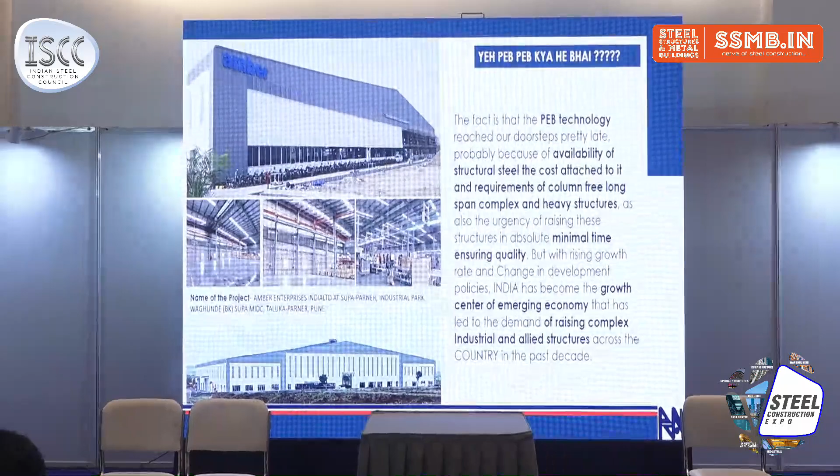Now, this is one project which we have done in Supa MIDC. It's 3.5 lakh square feet. As you can see, a long span structure. And we completed it in a short span of 6 months, including, as I always say, pencil to production. You pick up a pencil with an idea, develop the idea from concept to detailing, get into manufacture, get into erection, and complete the whole process. The RCC design is left up to plinth. I'll come to that procedure as well.

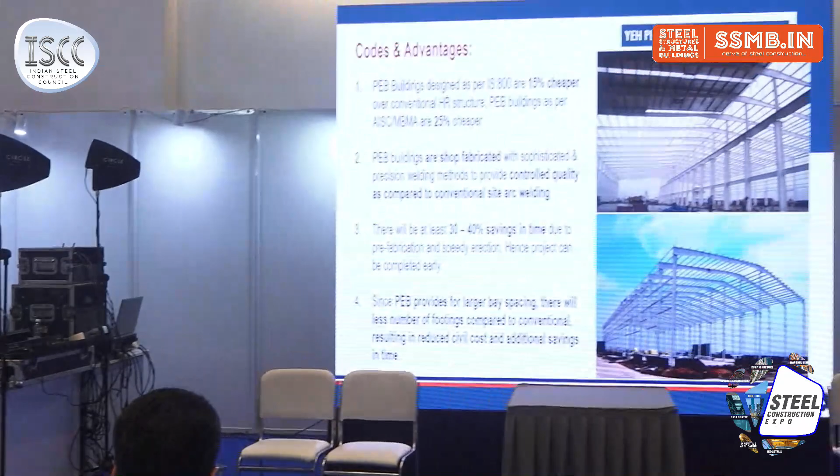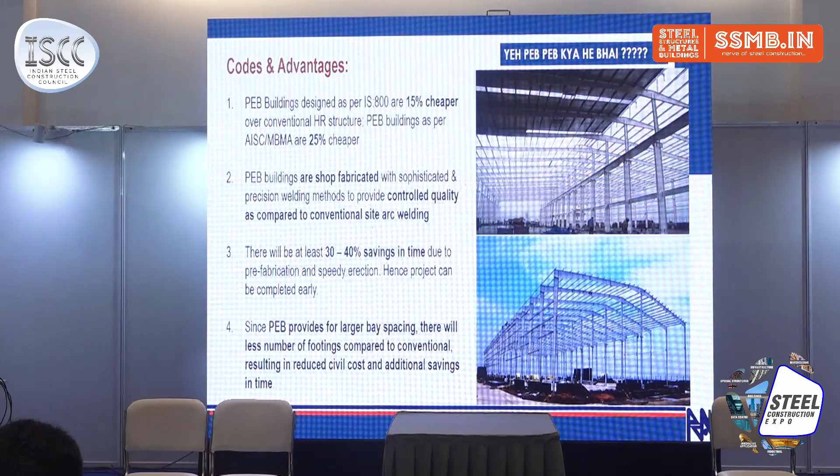Now the codes and advantages: 15% cheaper over conventional, that's what the code says. They are shop fabricated, with controlled quality as compared to conventional site arc welding. 30 to 40% savings in time, which I have been talking about. And it provides larger bay spacing, resulting in fewer footings compared to conventional.

Now, when we go to RCC buildings, those who are doing residential, I think there was a guy here with residential buildings, we are talking about 3 meter by 6 meter spanning. Here we are talking about 50 meters plus. So we have to avoid columns. And people say it's going to be heavier, zyada lagega steel, span badhega to zyada lagega. It's not like that. We reduce the number of columns.

It's like a concrete building, sorry, structural engineers, I have to salute them, 3 meters by 6 meters now moves to, let's say, 10 meters by 18 meters with post-tension slabs or flat slabs. But in that case, the comment is they are going to be expensive. And I show them an analysis: look how many columns we have saved, how much concrete, how many footings, how many plinth beams. If you calculate the overall picture, you will find that this technology is cheaper.

So technology always comes with a rider of cost saving. Either it is saving cost or it is saving time. Both are equally important because time again is cost. You save time, you can go into production earlier. If it is a shopping mall, they will start selling shirts and jackets much earlier and make money.

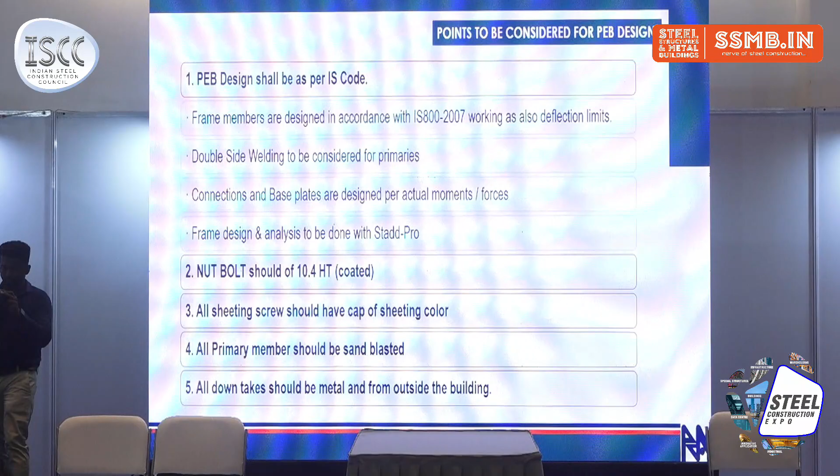Now there are a few tips which we wanted to give. Frame members are designed in accordance with whatever IS number. I think it is revised and updated now, but the basic was that. Double side welding to be considered for primaries. Connection and base plates are designed for actual moments and forces. Nut bolts should be coated. All sheeting screws should have a cap of the sheeting color.

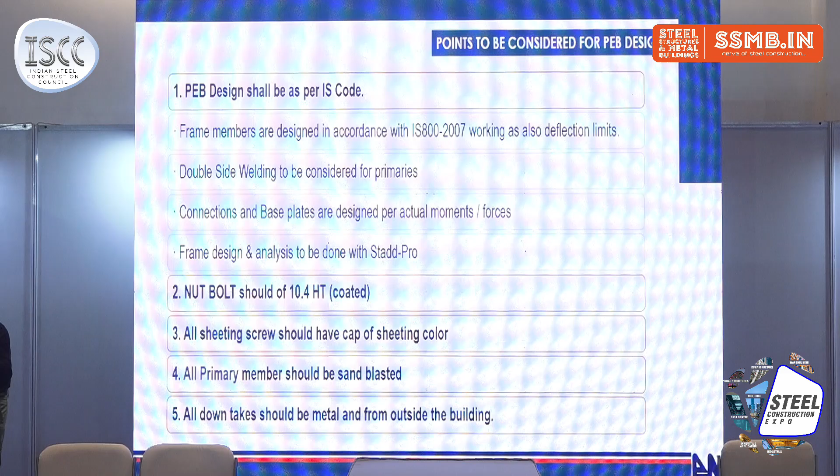Now many times I find that there is a difference between PEB agency A and PEB agency B. They try to have some shortcuts. So they will say, "ठीक है यार, nut को color क्यों लगाना है?" I mean that is not there. But there are some companies like Interarch, and I've seen many good companies who actually bring in the caps which match with the RAL color of the sheet, and then it makes it really beautiful.

Okay. Because we don't want to exhibit the nuts and the joints and the junctions of the steel. We want to hide them actually. So we do that. All sheeting screws should have the caps and all primary members should be sandblasted. Downtake should be metal and from outside of the building. No, I have a correction here.

The correction is, most of the time the PEB agencies, along whatever grid they have, they take a gutter there at the top and a downtake from the outside. Now this is actually killing our architecture. Because whatever the length is, it is divided by those pipes running down. And if it is an ordinary PEB agency, the pipe color will not match with the sheeting color. That means it is spoiling the building. And we have come out with this technology basically to make beautiful buildings.

Earlier we were calling them shed. I hate that word called SHED. Why shed? I mean, it is a building. It's a built form and it can be designed beautifully. The length, the junctions, everything can be thought of. We can play with the colors of the sheets. We can play with the planes of the sheeting.

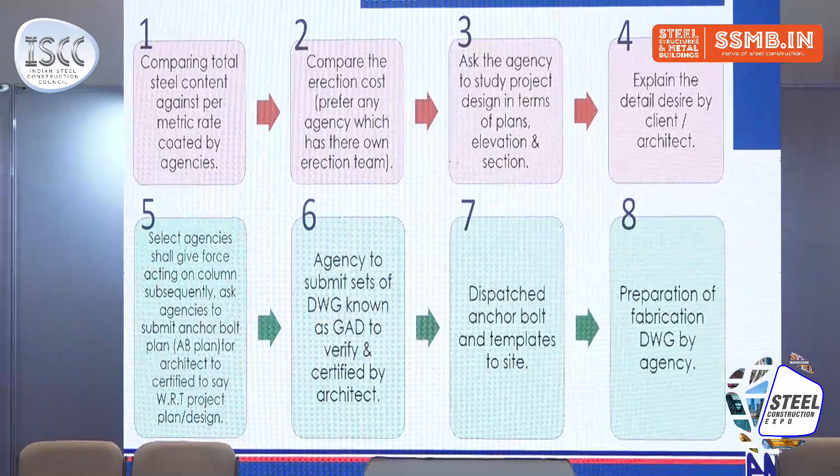Number 2, compare the erection cost, prefer any agency which has their own erection team. The moment you depend on the local erection team, you are asking for troubles, because then you will have all people coming, including the politicians, coming as erectors. Now, this is something very, very serious that is happening on sites. So engage a company which has its own erection team.

And I was talking to people from the PEB agencies that the erection team needs to be trained for your kind of products and your kind of systems, so that they don't end up making any kind of mistakes or errors. Ask the agency to study project design in terms of plans, elevations, and sections. Now, the marketing team of the PEBs, they are always forcing the design team to do it quickly. And there is a saying in English which says haste is waste and hurry is dangerous.

So please see that the best part of the PEB is the design. So try to understand the requirements of the client or the architect or the consultant. Try to have options of designing the whole thing, and then probably give it to the costing or the marketing team to actually evaluate how much is going to be an offered price. Explain the detail desired by the client or the architect.

Selected agency shall give force acting on column. Now this is very important, that they need to actually work out what are the forces that are going to act on the foundations and the columns, and then we design our foundations and the columns. So that is a very, very important stage.

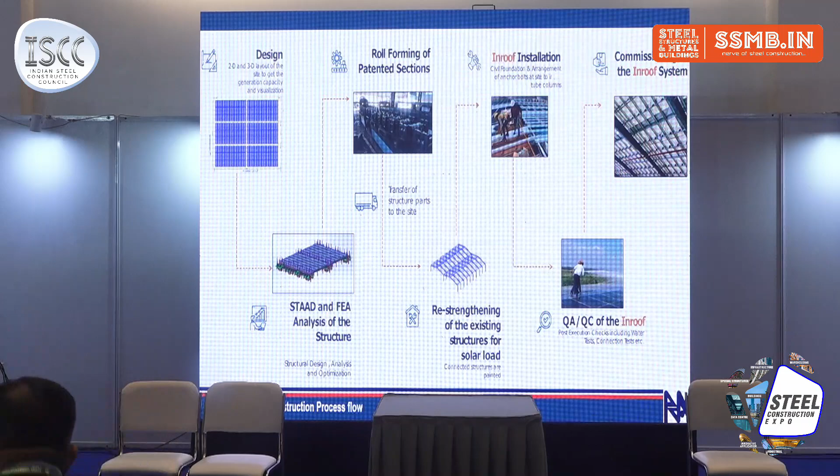So you start with the design, roll forming, the STAAD analysis, the roll forming, then it goes to re-strengthening of the existing structures at times if it is required, the Inroof installation and commissioning of the Inroof. Now Inroof is one of the solar panel kind of company.

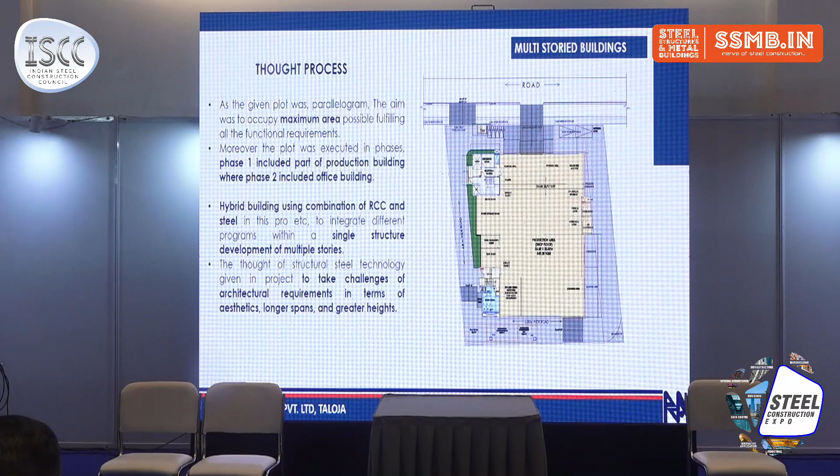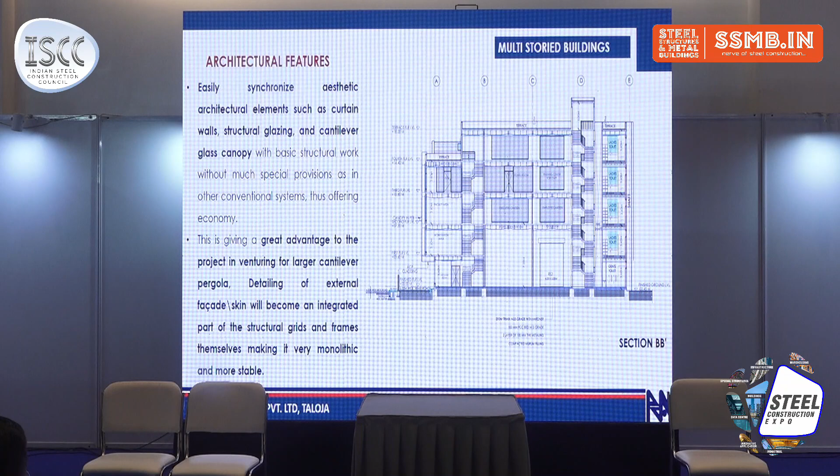That is the plot area and the built-up area. The kind of plan that we prepared. These are the sections. You can see all the floors overlooking the production. Great advantage to the project in venturing for larger cantilevers, pergola, detailing of the external facade of the skin. These are some of the more detailed things.

You can mention it's a hybrid structure because all the RCC staircases are. Yeah. So there was a fire regulation saying that staircases cannot be done in steel. So we had to actually integrate concrete. I think the lift shaft is also in concrete, and the rest of it is all resolved. And we have invisible fire curtains. They are not seen. Whenever there is fire, the curtains will come down.

So we use some technologies. And now, of course, fireproof steel is also coming up. So if that comes up, I'm going to the chief fire officer of the state, so that he will not trouble us anymore, because we want a complete building in steel. So the crane and all those things, a very compact site, of course. As I said, the detailing needs to be done.

Then I'll take you to the next technology, that is LGFS, or the lightweight and speedy construction thing. So we had this great challenge that there was a factory existing and it did not want any dust inside. But they wanted a ground floor and a first floor building within the factory building. So we thought, what could be the technology to be employed? They were not allowing me to excavate the ground, so no footings.

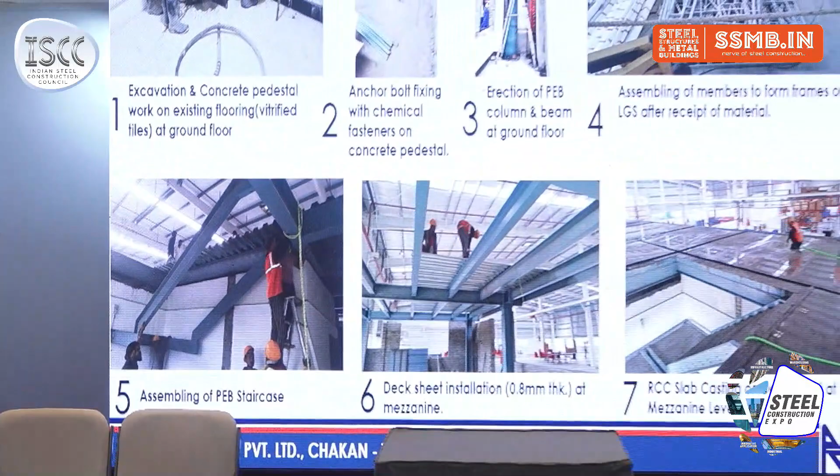And an award-winning project. Fourth one is assembling of members, form frames, LGS after receipt of material. Assembling a PEB staircase on site. Each number that I am giving is 3 days. So the project was completed practically in 30 days. 30 days handing over the entire canteen building. The entire labor is so happy.

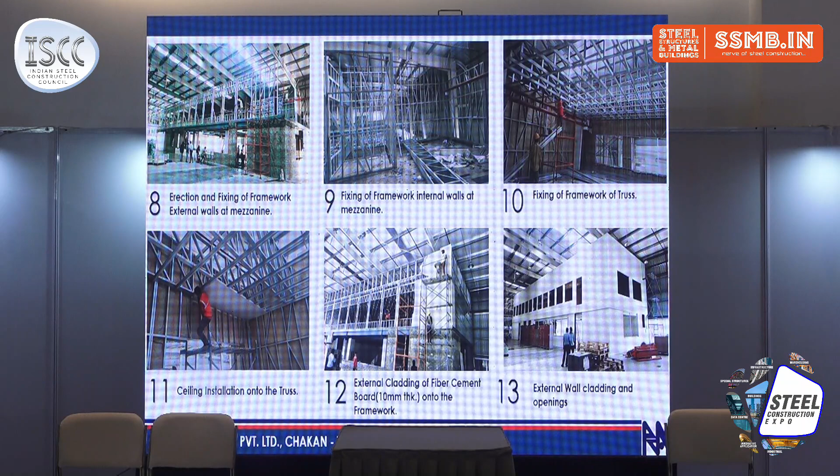So we normally don't use brick. With brick right now, brick is not available only. People talk about the stones. No labor can lift the stone the way they were doing it earlier. They cannot lay the stone the way we have learned in colleges. So why go for brick and stone?

So we have dry walls. So a lot of different walls are coming up and we can experiment with this, save time, safety, fire safety and everything. So all those properties are there and we completed that. This is not the plastered one, it is a ready-made sheet that is just fixed to that grid. And then, of course, the interiors.

So the Italians are happy. They say you could do it without, the production was on while we were doing this, and no dust and nothing. Okay, friends, it's time to welcome this new technology, probably refine them to suit our design as cost parameters, working conditions. But then we all will probably succeed in catching up with the world in construction and yet achieve our own Indian flavor.